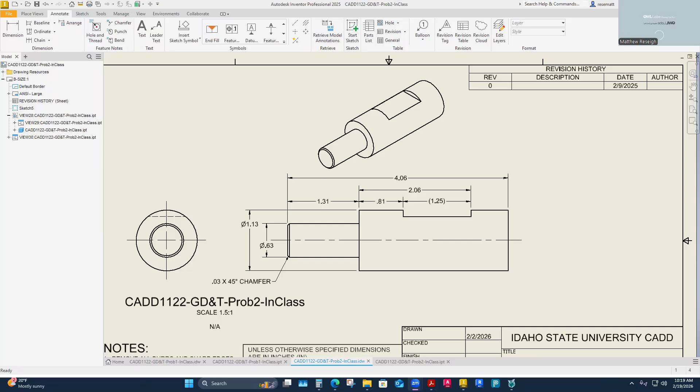Sorry, this is what it looks like, everyone, which isn't too bad. It's just modeled as it is, mostly as modeling, and then I've started to throw my normal drafting dimensions on that I'm used to doing. So I haven't done anything out of the normal here, other than I've kind of analyzed it. I like these dimensions better. That's the only thing I've really changed here, and that's the last. I can't think if I'm missing any.

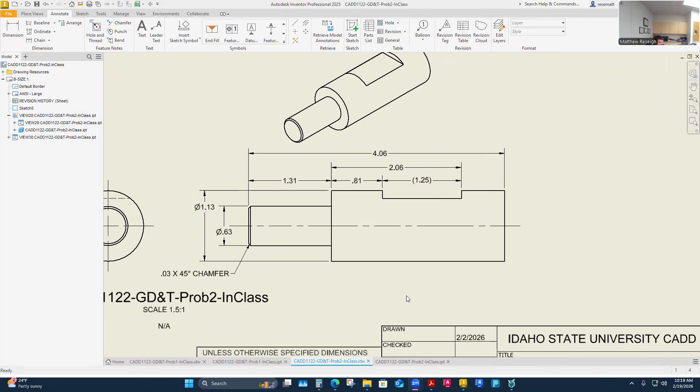I can check my cheat sheet to see if there's any dimensions. Yeah, a depth — I'm missing that, of course. Of course I am.

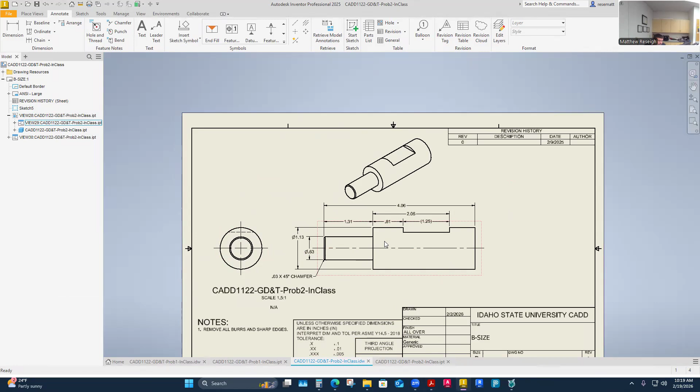Yeah, except I don't love this. Oh, yeah, yeah, it is on — it was drawn so that it did. So it was easy, this was my front view drawn on a profile. Yes, I did a revolve for sure. But I don't love the dimension for that depth either because it's pulled from a surface down, and it's a round surface, so it's just one little point of that round.

If I can really hold a dimensioning tool at 12 o'clock and pull it down — I don't love it, but I'm going to control the center axis as a datum, so I feel a better dimension for that depth would be from here to here. It does make way more sense.

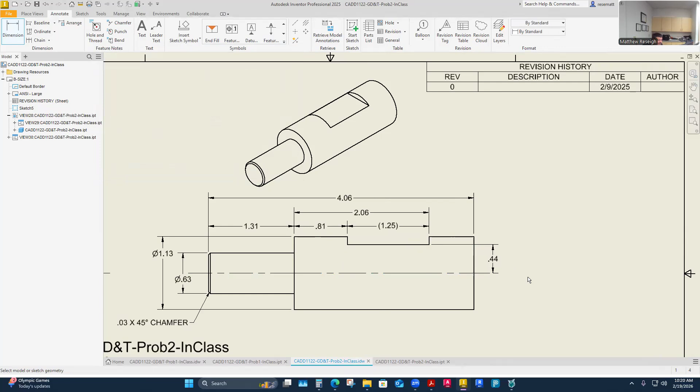Yeah, just, I don't know. I think I had that quote that was like, when in doubt, center line out. Definitely center line dimensions, especially on round parts. Poor guy with calipers, trying to hold his tape or whatever it is perfectly to measure an eighth of an inch down or something.

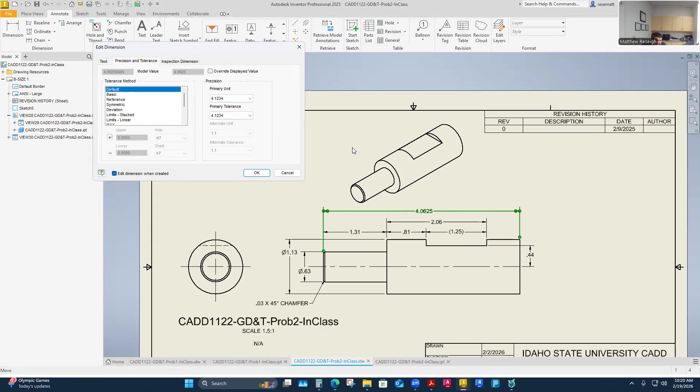Yeah, I like this better. I do want the 4 decimal place standard that was on the other drawing, so I'm going to change all my dimensions. I'll change one here to 4 decimal places, and the tolerance I'll want to be 4 decimal places as well, in inch units. Yep, even though I'm not going to apply a tolerance to all these.

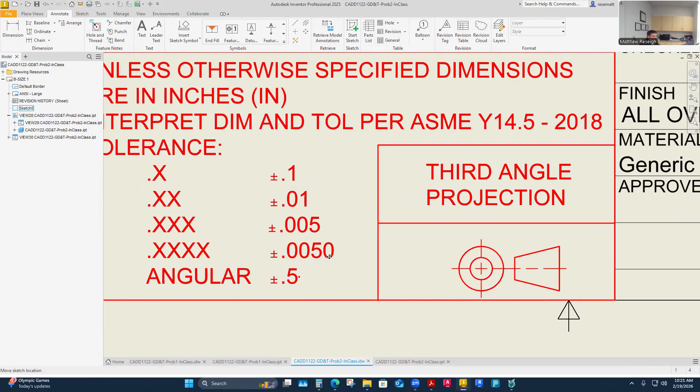At 4 decimal places, it's really the same tolerance as 3 — it's just that I carry 4 decimal places in the display, but it doesn't necessarily make a finer tolerance for the extra decimal place, in case you haven't looked at that. But they're actually the same tolerance. In a way, I just have the option to have a fourth decimal place show up there if the dimension was modeled that way.

So let's see, then I'm just going to copy those properties, right? I think I just hover over it, copy properties, and let's go to town here. I'm going to have to replace that one, unfortunately — that will take... I like that the diameters stay, but it kind of messes up any of your local notes.

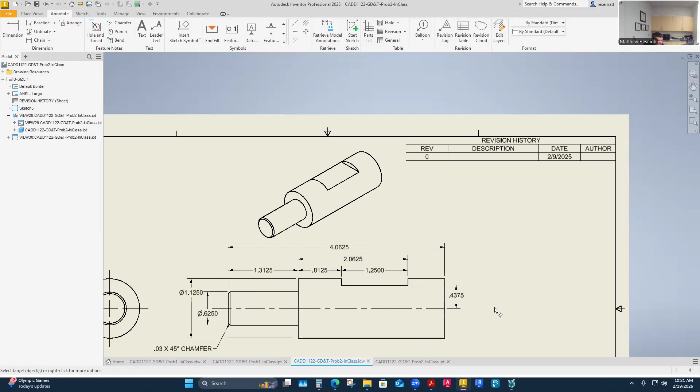I'm surprised the chamfer — I think I just left it, it's just a 2 decimal place chamfer. So I think it's maybe non-critical, just knock the sharp edge off, and then I'll make this one a reference dimension though. Okay, so I think that's a good start.

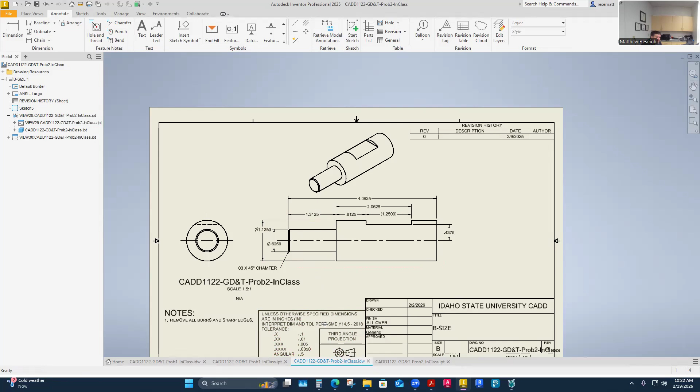Now let's do GD&T. So we've decided that we want — to me, when I look at what's going on here, most of the GD&T really is associated with the form of this particular little extension, the smaller diameter extension here from this shaft. So this seems to be what we're controlling mostly.

Definitely we are controlling — we've established that the datum we want to use is, and there really isn't any datum control here, it's just that the datum is the axis of center line. So they've applied it right here. Then the other datum we want is kind of the shoulder surface of that, where those two diameters change. This is definitely a surface datum and an axis datum. So I'll apply my two datums that way.

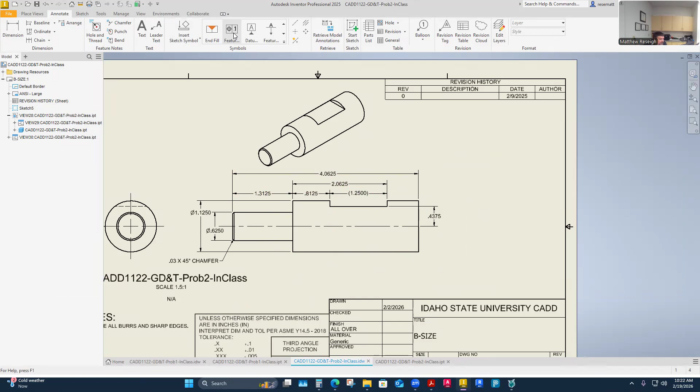I'll keep those same two, and maybe that'll keep me from having to add a third datum by changing where I'm pulling my dimension from. So I will say datum — datum A is this one on the axis here.

So I think I can just select... oh yeah, I don't have that dimension. It's over here, so I got to put it over here. Just by the way, I pulled it in between the two views. I like that better too. So that's one other change I've made.

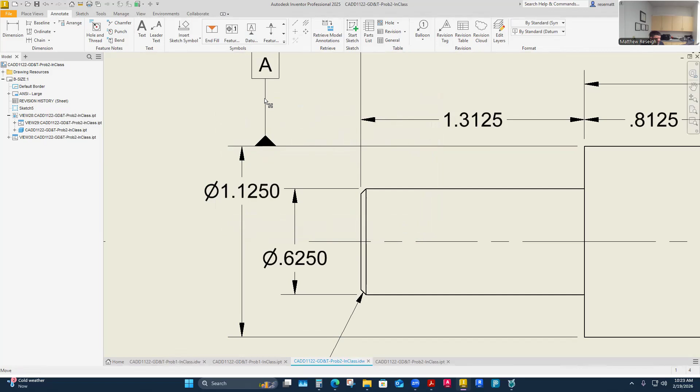And it doesn't like that, does it? Let's see, I think if I just select this, yes, it will let me place it, and then I'll slide it over. That'll be datum A, only I'll turn it so it's just straight up and down. And that would be datum A surface, which would be that top surface there if I didn't change this. That's also a broken surface on the top, so that gets a little more complicated as a datum necessarily, since I have this break in that continuity between that datum. So that's not where I want it.

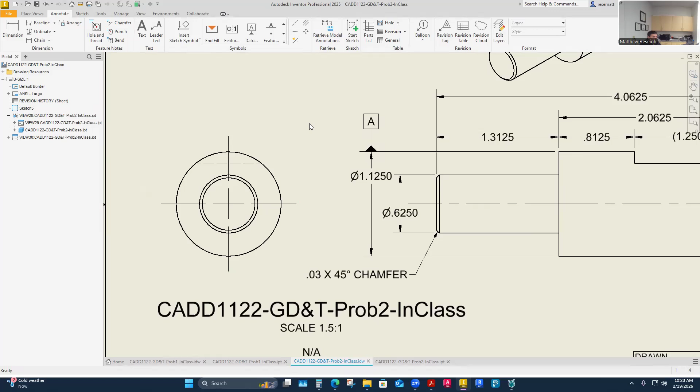I'm going to actually say it's the axis by sliding this thing over and aligning up with the dimension. So now that's become not a surface, but it's become an axis. Datum A through axis, that thing right there. Great.

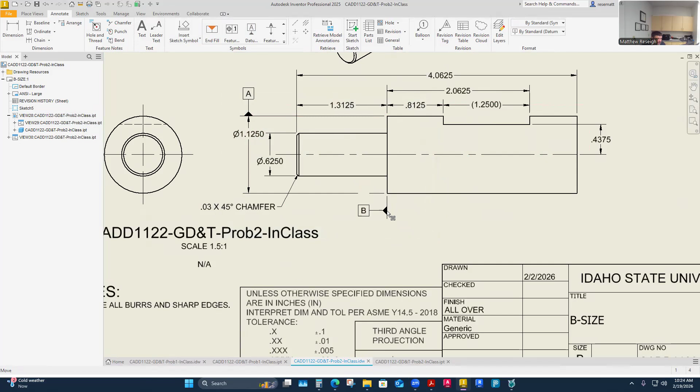Datum B shoulders, let's do that one too. Datum B shoulder right there. I'll change that to B. And I think, and then I'll just leave it like that. But it wouldn't have been wrong to add a third one and pull all your dimensions from the end. So I think that's a valid way.

But now I've made it so all my dimensions are kind of pulling from, in some ways, from the axis or from the datums. And then what I would need to identify maybe here is definitely what this is controlling. So I maybe like this one, only I think I'm just going to increase how much - like 5 thousandths is better than 2 thousandths, but I think I'm going to take it all the way up to 10 thousandths for the cylinder.

This is a cylindrical form tolerance. It's not a datum, it's just form control over that surface, right? So we need to maintain the cylindrical nature of this little protrusion out. And I'm going to say within 10 thousandths. So this is, and I'm going to point to that surface.

They've even additionally applied a finish symbol, which is that little check mark with a number. This is like they want the machinist to pay attention to how fine or coarse the finish of that particular part is. Maybe it slides into a bearing or something - I see a shaft like that with that little protrusion, and I'm thinking, let's slide a bearing over that thing to support that shaft, or some type that probably allows it to turn.

I can't remember what chapter surface finishes are in, but in your book I could probably look real quick. There is in our book a great little chart of general surface finishes. Let me just look, stand by for just a minute.

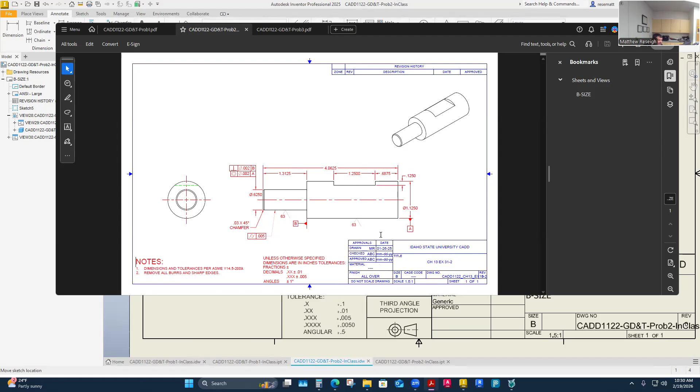So anyway, I thought that was interesting because this particular drawing, I don't remember doing it on any other drawings yet, so I wanted to kind of beat that to death. I think I've sufficiently done that.

So that means we've got a couple geometric controls, especially trying to control this a little bit more than just general purpose. So we want to control its cylindricity - yeah, I think that's right - the cylindrical nature of that feature.

And so it's just going to be a feature symbol. I think I can just use its leader line capability here, right? I'm just going to point to it and say, hey, I'm going to control this, double click it. I don't want any presets, so I'm going to start with a new fresh one.

I'm not controlling position of that, I'm controlling form. And it's not even a datum - this surface really isn't, it's just that I want to control the form. So I say it's cylindrical. And instead of 5 thousandths, I'm going to give the machinist a little bit more than that. In the original drawing, we decided that 10 thousandths would be a more realistic finish on this.

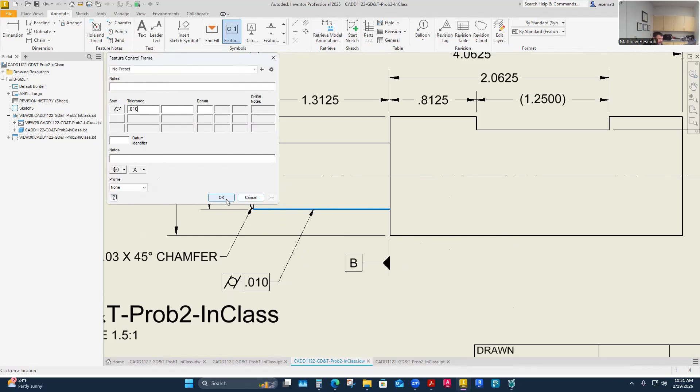So that means I'm just holding the form of that from the axis datum A there going through it. I'm just probably going to evaluate that as I run my inspection tool across here, that the cylindrical nature of it doesn't deviate beyond 10 thousandths, at least in this area. And this area to me is less of a control, obviously. I'm not worried about this. It can kind of run as general size. I think I'm controlling the surface finish of it, but that's about it. So I'm going to say okay on this, it's just form control on that feature.

I think right here is where those - that's just our normal symbol library. I was thinking there was a symbol library on here, maybe it's this one. Yeah, this one gets into that stuff where you're controlling the tooling that the machinist is using to finish this off, and that one I would be leery of wanting to apply without better understanding. So really, I'm just looking to enter this one here - if I hover over it, does it tell me the roughness average max? Yes. What is it?

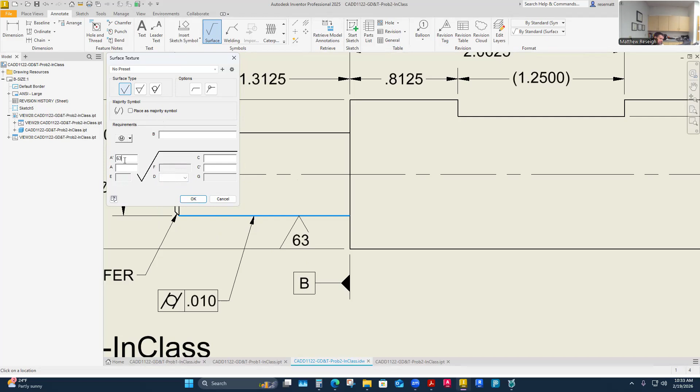Oh yeah, I haven't - I just... I would say don't worry about it if it didn't pop down like that, because I think you can just grip it like when you're done here. Click one, and then drag down the direction. It just jumps that way. Just move your mouse that direction, and then I use right click and drag to the right.

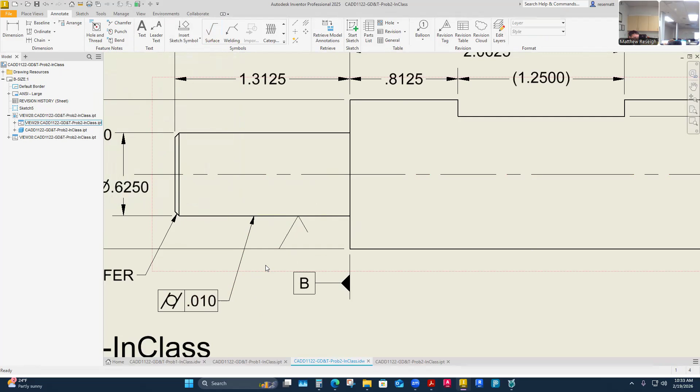Yeah, because what I was saying is even if I just place it here, but if you bumped it, then it will - yeah, this is movable, right? Like you can even turn it into, because these can be leader line driven as well. So if I can't get into the direct surface, kind of like a datum in some ways, I can actually pull this away and have a leader line apply to it. So I know it gets a little busy, and then I can double click in here to get back into that menu, and all I'm really adding is that surface finish.

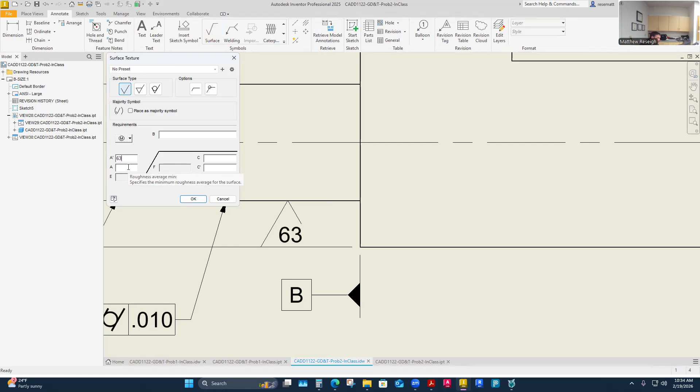I feel like this is real just surface finish 101. I would probably leave them unless the machinist would probably say, oh, I'll put it at 125 micro inches of finish. Here I'm just saying the one thing that I might do is express a little bit finer control here. But I would probably only do that if my bearing, whatever I was putting on this, had something - if I had an indicator to call that out. But I think that's what we're doing - we're just controlling that surface. We're even controlling this one, so I can put the same one over to this surface here.

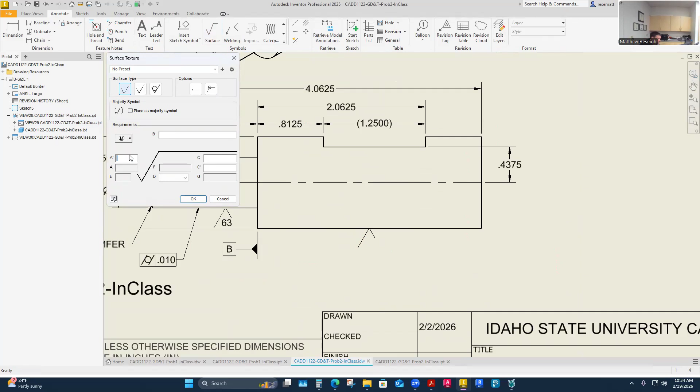Oh, I probably snapped it to the center line, which is okay. And then I didn't let it apply. It's 63 micro inches. I think those are the only two surface controls. Those are really our only two surfaces. Not really - we have some flat surfaces, but...

Okay, now we need to analyze what we really are controlling, other than we've got some cylindricity control. So what else - let's look at what they're saying. I think this one makes sense to me, other than I'm going to increase the tolerance on it a bit. So these 2000ths is - I'm going to go to 10,000ths as well. So what it's saying is, okay, I'm controlling this size, which is 0.625. And it looks like the control I'm saying is it needs to be perpendicular to datum B, and I'm going to increase this to 10,000ths.

So I need that this, and really that is - if I think about this, yeah, I'm saying that it can be out of perpendicularity only up to 2000ths right here. Should that be a diameter? I don't think so. Is that... I would question whether that should be a diameter or if it's just kind of... Does the diameter make sense there? Hmm.

It would make sense to me on this concentric nature, asking that it would be concentric to datum A at 2000ths, which I might increase to 10,000ths, or at least match my cylindrical tolerance. What I'd worry about is conflicting tolerances, like holding a tighter tolerance than the cylindrical nature I'm holding. These kind of work together in some ways, so that's one reason I don't love these tolerances.

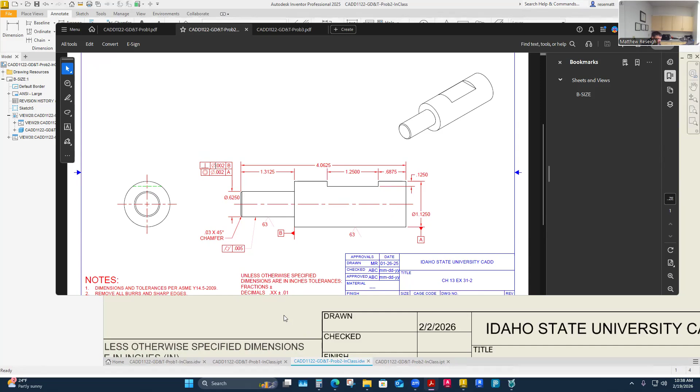But I don't know if I have to be perfectly perpendicular either. That one was kind of in CAD, you build them a little bit different, it's actually easier to do that. But what I have is we're saying perpendicular.

I'm questioning, I like the 10,000ths, that's actually what I do want to use. And I guess I'll say diameter here, which is right here, right? Diameter, I'm just going to question that later. There's no maximum material condition applied, but just that it's perpendicular to datum B is what I'm trying to control here.

It's not too... I think it is read as precedence though. So if I stack that one above the other, I do think I would consider its perpendicular nature first as its primary control, and secondary is how concentric it is to A. And really you're going to have to check both. So even having a precedence order, I wouldn't say either one really takes precedence over the other. They both have to be evaluated, how perpendicular it is to datum B and how concentric it is to datum A. I feel like they're both going to be evaluated with equal control.

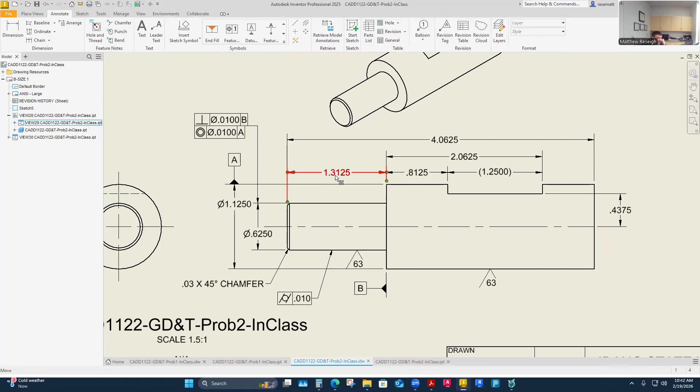I think you could even point to that surface. I don't think I have to point — I'd even question how I can move my leader line to point to different things. It makes a big difference, but I think I probably could move that to just point to the surface. But this is really the end of this drawing, right? I think so, with a little bit of touch-up there.

If you think about it, I'm not really controlling any dimensional locations with GD&T — I'm more controlling form than anything. What does perpendicular fall under? Which grouping?

What is it — position? Is that right? No, no, no. Position falls under location. Let's see here — perpendicular falls under orientation. So if you remember your wall chart, definitely know how to bundle these: straightness, flatness, circularity, cylindricity are form controls. Orientation controls are parallelism, perpendicularity, and angularity.

Profile of a line, profile of a surface — I'll probably never even touch those, so I don't worry about them. Or runout — those I need a little deeper understanding of. Location is definitely one we will use, and that's concentricity and true position.

So I guess I am, yeah. In my previous one I didn't have any basic dimensions. Here I'd have to sit and think about it a little more. Nothing catches my eye super, except this dimension here, and especially because I'm pointing to it, I'd almost want to move my leader line to point to the surface, kind of like this control. But I don't know, I'll think about this one a little bit.

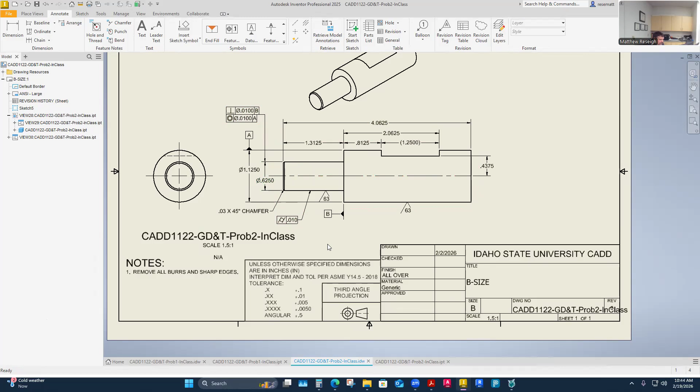At this point I've at least kind of recreated it, and I'll save it, and we'll call that good.

There's three more. Yeah, you can turn that in. It makes — but all of these make me have to do a little more homework.

It doesn't end. Do you see how detailed it gets?